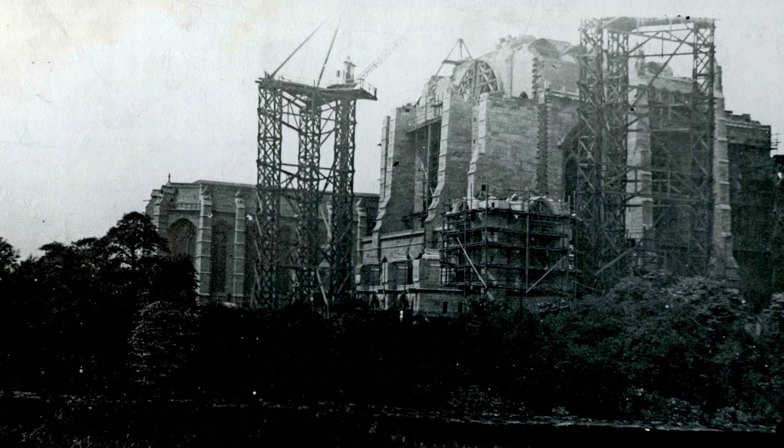I was intending to upload a slideshow of old photographs of Liverpool Cathedral's construction as an annex to LHFE End. But after seeing so many warm and wonderful responses in the comments section, I thought I'd add some commentary to address some questions and queries.

The first thing to note is that on the internet, when doing a Google or DuckDuckGo image search, you won't find endless historical construction photographs. But if you start looking in archives, you'll find a lot of interesting stuff, which I'll be covering in LLG. This is where I've learned that books like this are very helpful - there are a lot of archive photographs and documents not accessible in free digitized form on the internet, but have been published in books.

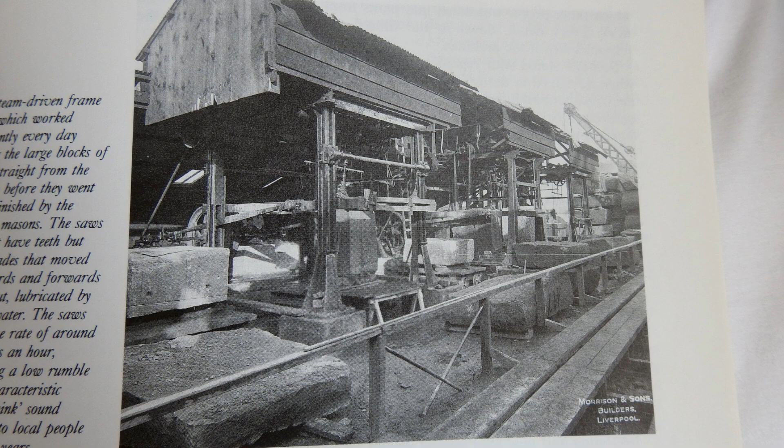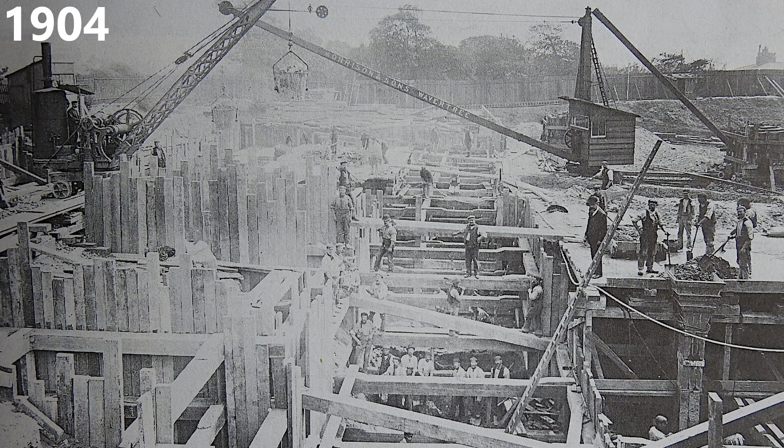This is a photo of early excavation work in 1904. The timbers have been used to construct a supporting amphitheatre, and if you look closely you can see on the steam-powered cranes one of the building contractors, Morrison & Sons, Wavertree.

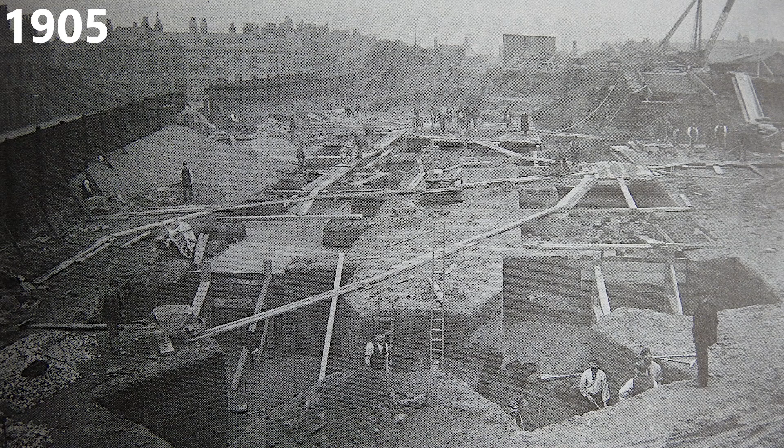The first area of the cathedral to be built was its Lady Chapel. Here are the foundations for that. What's important to note is the chapel is just one small portion of the overall structure.

Here is a progress shot. If you look closely, you can see the layers of brickwork forming here.

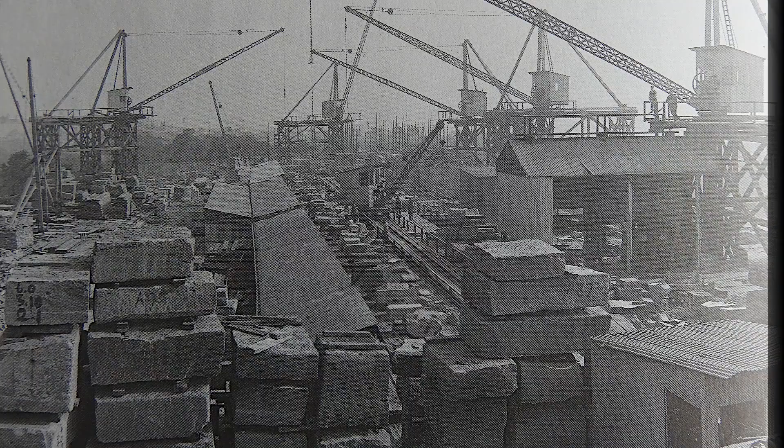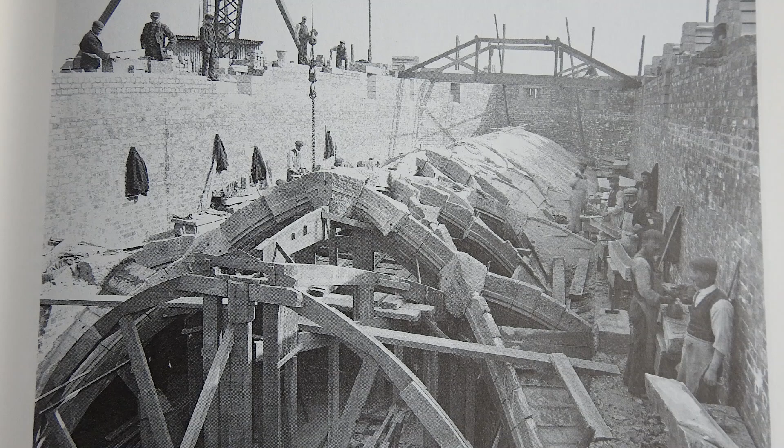Next came the chancel. Here is the beginning work on the chancel, again another portion of the cathedral. All the while the Lady Chapel is coming along nicely. The Lady Chapel and chancel were actually the first parts of the cathedral to open to the public.

And why did it open when the rest was not completed? Because there was a requirement to meet the demands of a growing and pious population. The First World War halted progress, but it resumed in the 20s.

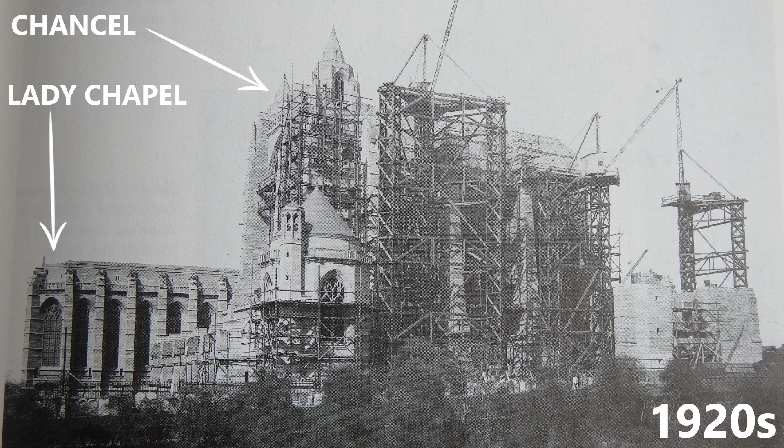This is a photograph taken in 1924, showing the completed chancel. Then came the central space. Here is one of them making good progress on the central space. And another.

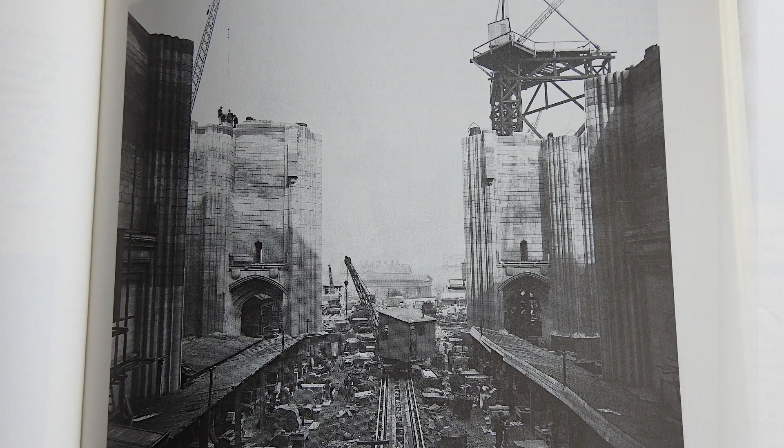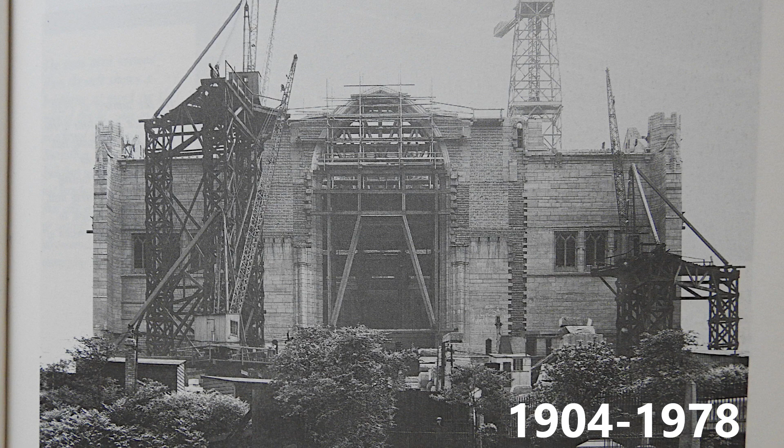There exists no evidence of this being a rebuild or renovation. The cathedral construction began in 1904 and ended in 1978. That's 44 years ago. It's the largest cathedral in England.

The cathedral's construction is not the mystery here. The mystery of this site is the old water tunnels that were constructed during the Enlightenment and the spring which still runs today. This site replaced an old medieval water system and infrastructure.

I've also seen a lot of comments insisting that we cannot build these structures, that it's a lie. And at one point I also thought that. Construction started in 1904 and finished in 1978.

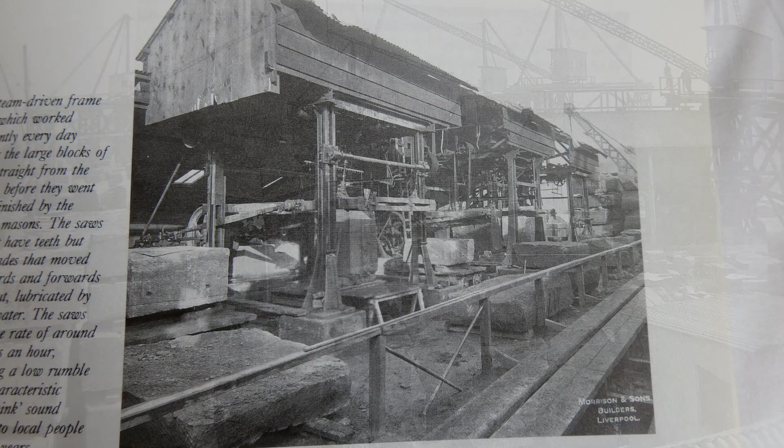Before World War II, the means of construction was primarily Industrial Revolution technology - steam-powered cranes, steam-powered saws, etc. This is a photograph and footage of the steam-driven frame saws, which worked every day cutting large blocks of stone procured from the quarry. After World War II, there was more modern technology, such as pneumatic drills.

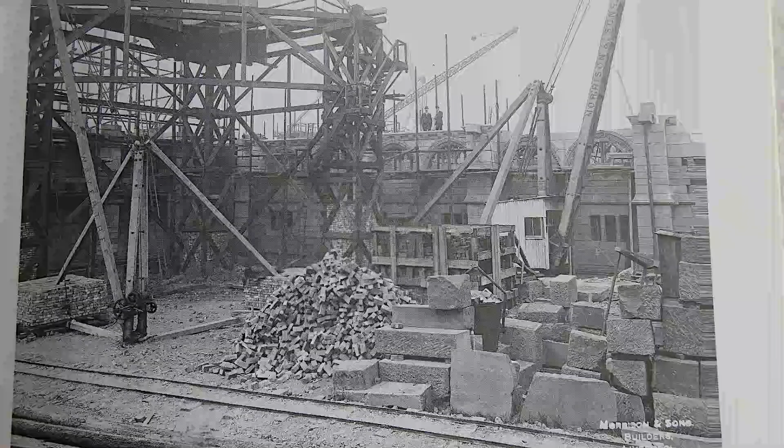The wars slowed the progress of this structure significantly. If it wasn't for the wars, I'd venture that they may have got it done in around 45 years. The interior of the cathedral walls are made from thousands and thousands of red brick.

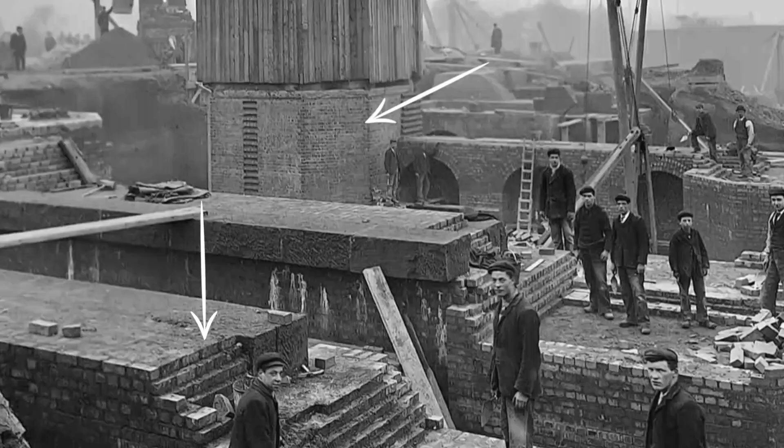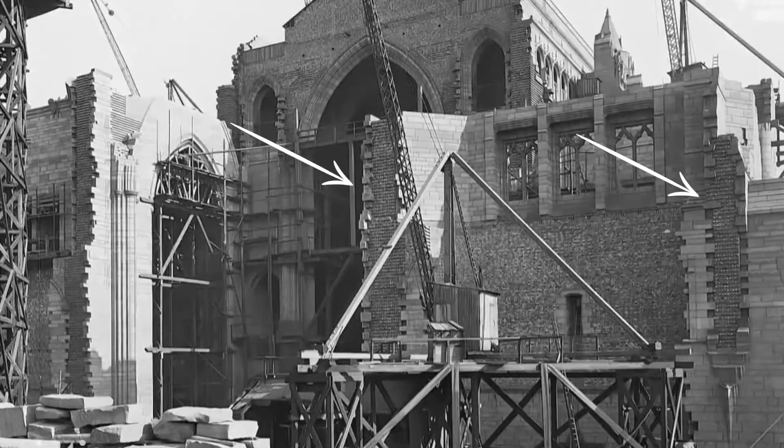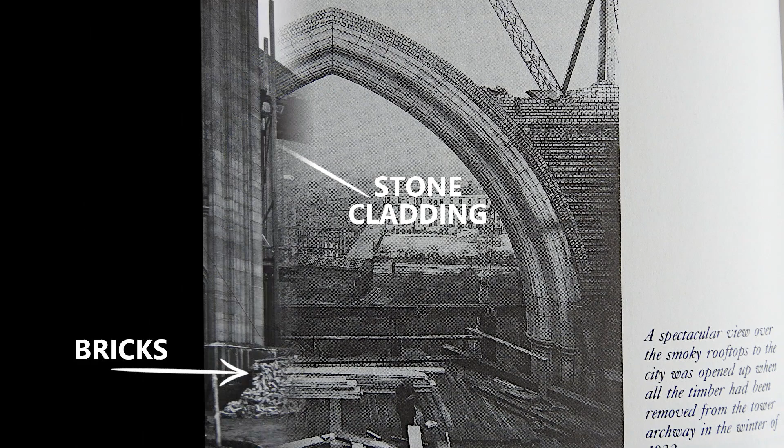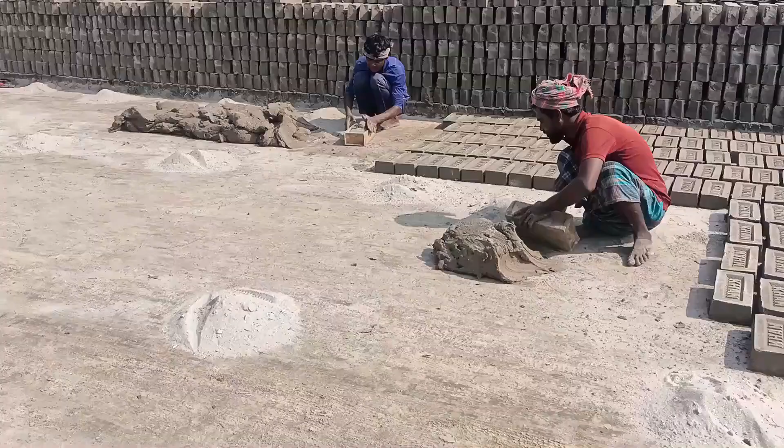The exterior is sandstone cladding, or a facade, and you can find an abundance of photographic evidence testifying to this. Red brick is beautiful, but really bricks in general are nothing special. They're efficient, easy to produce en masse, and have been produced en masse since antiquity. They certainly could do it in both the 19th and 20th centuries.

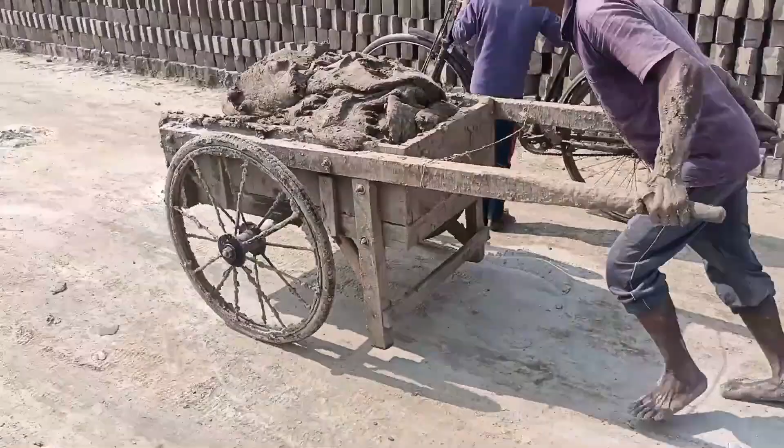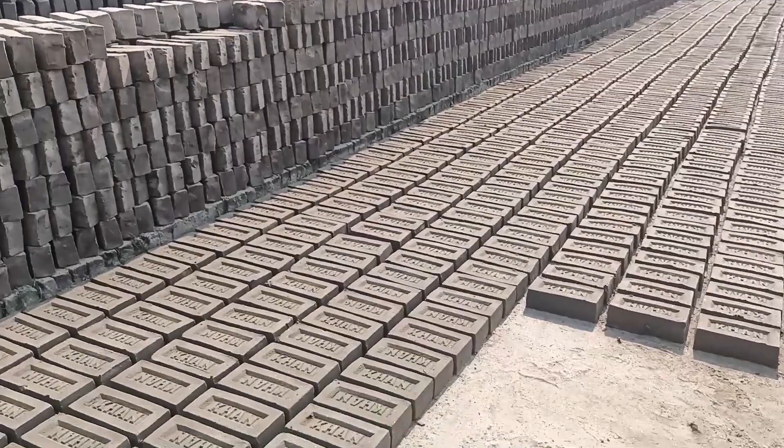There is a difference between old red brick and 19th century Victorian red brick. Now you might say, aha, so Liverpool is not a real cathedral if the majority of the wall's interior are composed of red brick. But that's not correct. If you look at many medieval cathedrals, you'll realize that the walls are composed of a type of rubble interior and then a carved stone cladding exterior finish. Again, there is nothing impossible or particularly special about this.

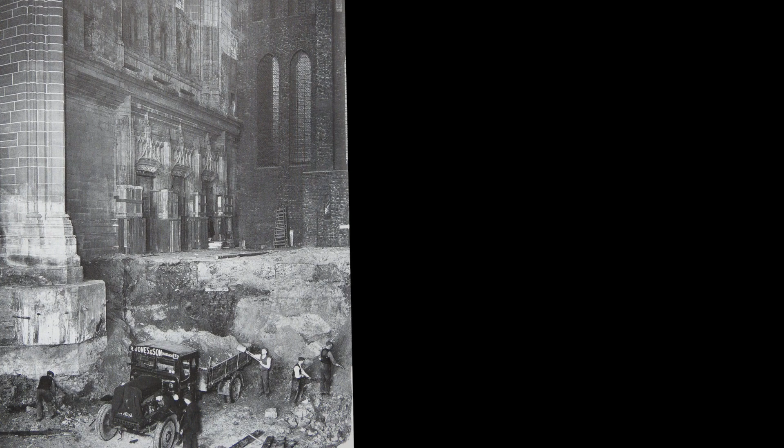What we see here with the red brick is nothing more than a modern upgrade to this medieval technique. The red brick also explains this photograph. A few in the comments have referred to this image as proof of a rebuild, or that the powers that be are lying about this structure.

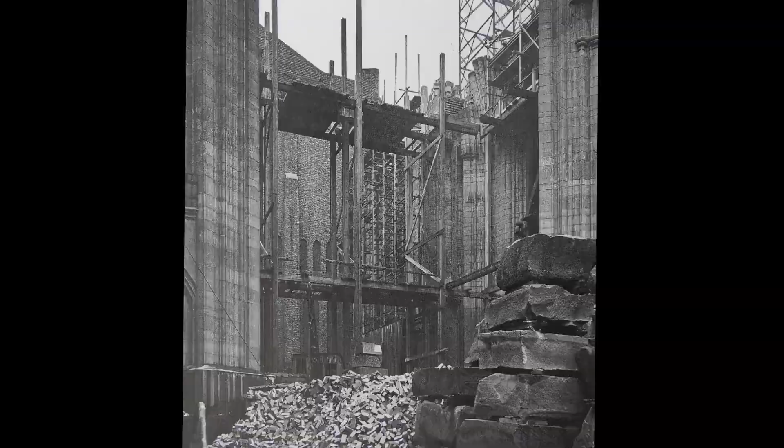But if you look closely, you can see that the photograph here shows a red brick wall. The same red brick we see here. And here. And here. And here.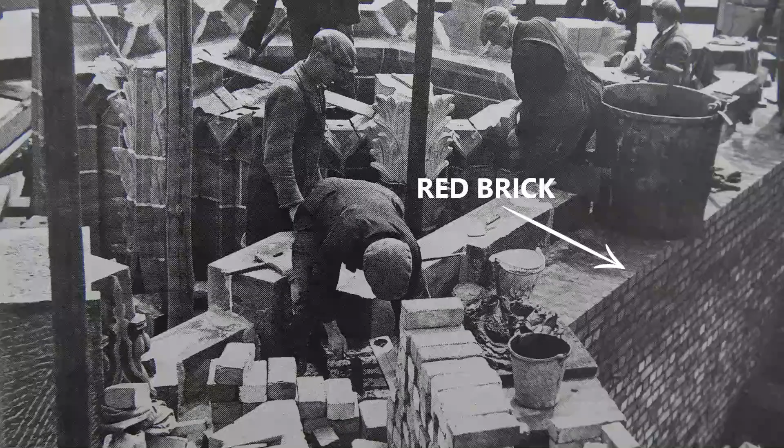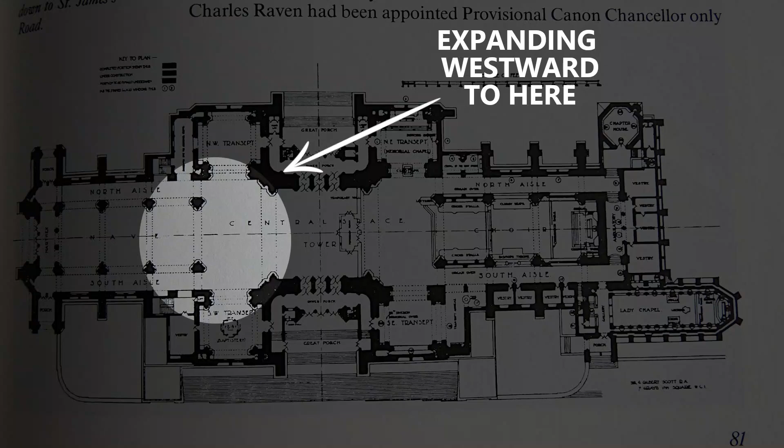Why? Like I said earlier, the cathedral actually opened much earlier, starting with the completed chancel. This is a long time before the structure was completed in its entirety. In 1938, when this photo was taken, they were expanding westward to here. This red brick wall here is a temporary wall.

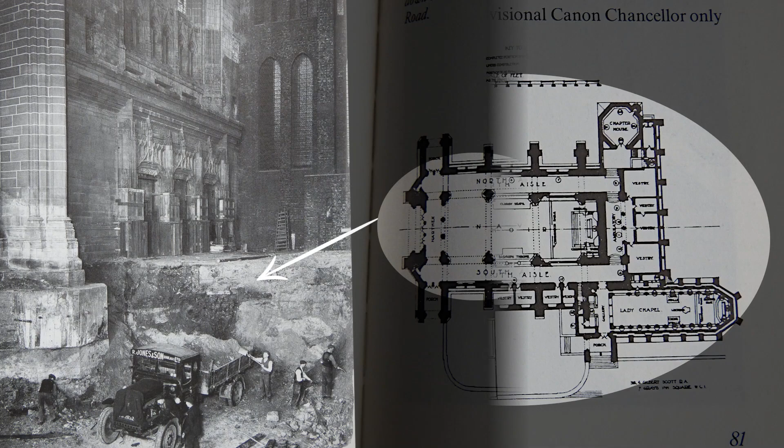Brick walls are easy to build. Ultimately, brick is Lego, and the public was still using this area of the cathedral. They are digging here to lay the foundations for the westernmost end of the nave. As you see here in the aerial shot from 1965, this end was still not complete and continually undergoing extension. Temporary brick walls allowed the population to attend services simultaneously.

Here is a close-up of this area as it progressed in 1969. Look, another temporary brick wall. And if you still don't believe me, then compare this area with a photo I took myself. This decoration is the same.

This border was not added yet. This tracery is the same. And these statues here are being sheltered by the timber boxes here. But as you can see, the stained glass up here is finished. Look, here is an image of them designing the glass.

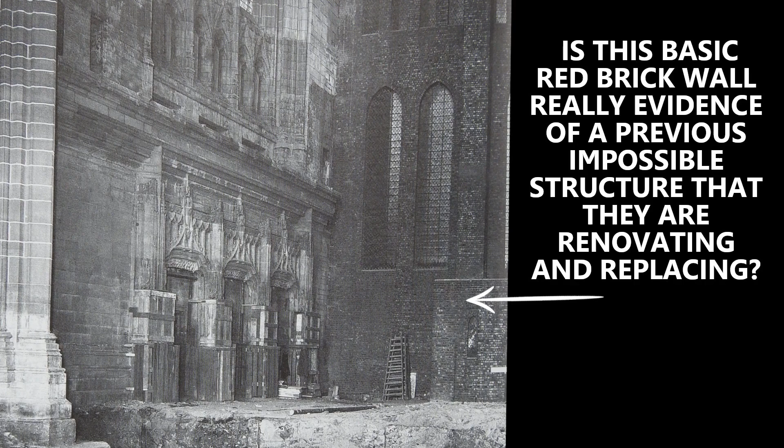Is this basic red brick wall really evidence of a previous impossible structure that they are renovating and replacing? Here is an image after the temporary wall was dismantled and the arch in place. A service is taking place despite the arch frame still being in place. As you can see, they used the cathedral while they were still constructing it.

I know you'll say the structure looks weathered and older in this photo, but you have to remember that this section is not complete. There is no roof above. The rain, the sunlight, the camera all affect how the stone and brick look in a photograph. We see that here. Variations in tone and highlights are not proof of genuine weathering, especially in old photographs.

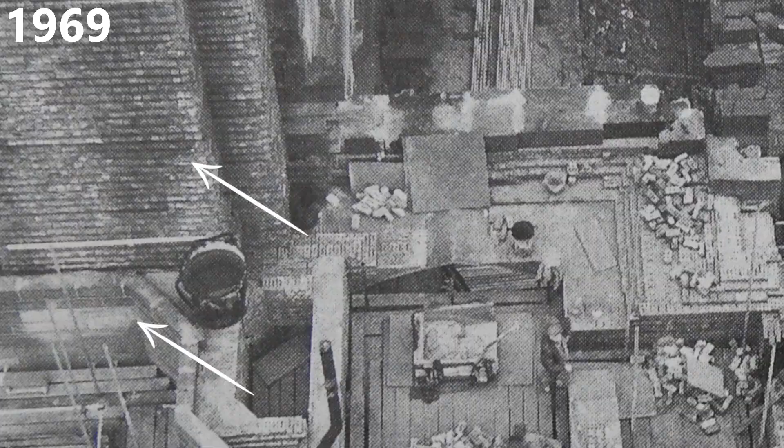Another trend in response is that Liverpool Cathedral was post-industrial revolution. What about the ones that came before? What about the structures that took 300 to 400 years?

And this is where it gets complex, and it's one of the central themes of LLG. In terms of genuine medieval cathedrals, Hereford Cathedral was completed over 171 years, York Minster 242 years, Gloucester 410 years, Salisbury 100 years, Wells 274 years, Exeter 288 years, Lichfield Cathedral 145 years.

But in terms of a lot of the structures that went up during the 18th century and after, and at such pace, this is where it gets complicated. Can you tell the difference between a structure like this and one like this? I never used to be able to, and I still struggle.

Both are in the Gothic style, both are parish churches, but Ludlow is genuine. This is what the interior looks like. And Belper, well, have a look.

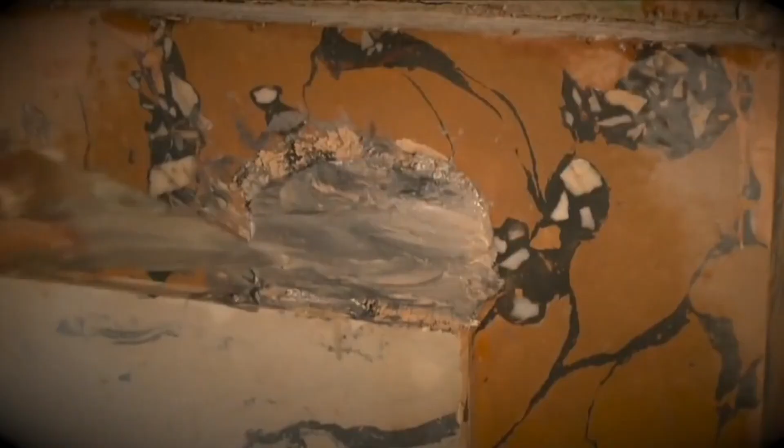There are many artificial stones such as Victoria stone, Portland cement, and stucco that went into the creation of a vast amount of classical and Gothic revival pieces completed in the 19th century, produced en masse with moulds. There is a difference between real, purist masonry and pseudo-masonry. These structures are not all equal, and they openly admit that they cut many corners. And why not? If you're producing en masse, you need the cheap and the efficient.

There is nothing impossible about this classical stuff, and I didn't realize that until I started getting out and looking at it closer. I'm not trying to discredit pseudo-masonry. Moulding like this is a talent in itself, but it's not the real thing.

But it does raise an important discussion as to how easy it is to edit and change structures with these techniques. I received a good comment on this, saying that stone carving is a hoax to throw us off the mark, that it's all poured concrete. But I do not agree. Great Pyramid K is good, and everyone should watch it, but it's deeply flawed and more of the same reductive revisionism that doesn't hold up to scrutiny. And the ending is very questionable.

This is all a big theme of LLG. I do not subscribe to the maximal approach. Not everything is poured, just as not all geology is a melted building.

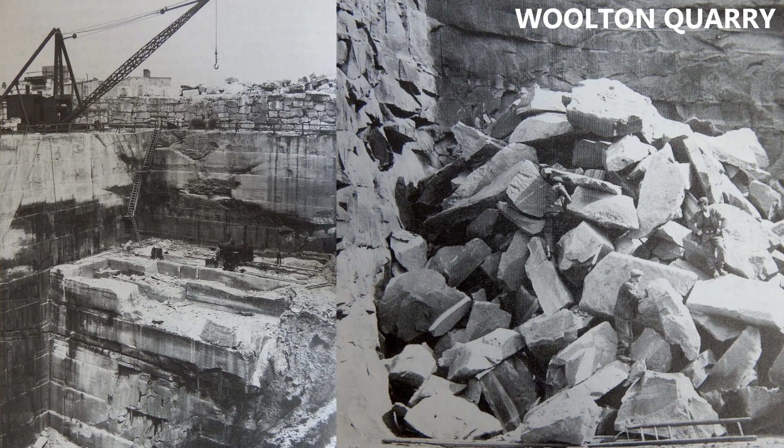And we see the same thing here. And here. This rock was quarried from Woolton Quarry. If you look, you'll see it's the same red pigmented sandstone.

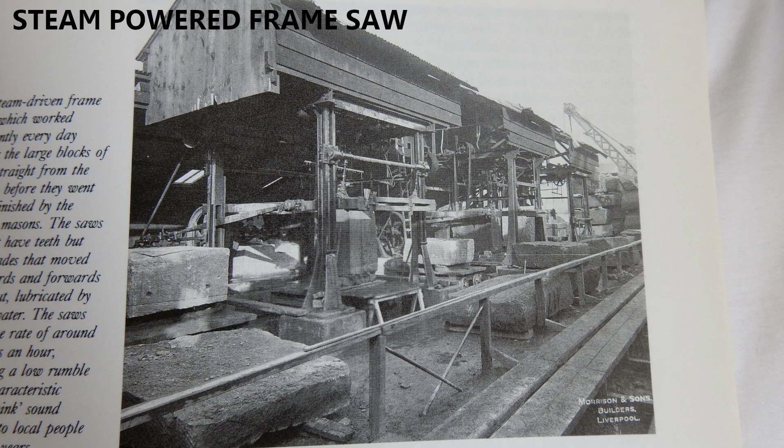This was cut with steam-powered machines and hand tools, but this only speeds up the process. The medieval masons built their sites right next to local quarries to be more efficient.

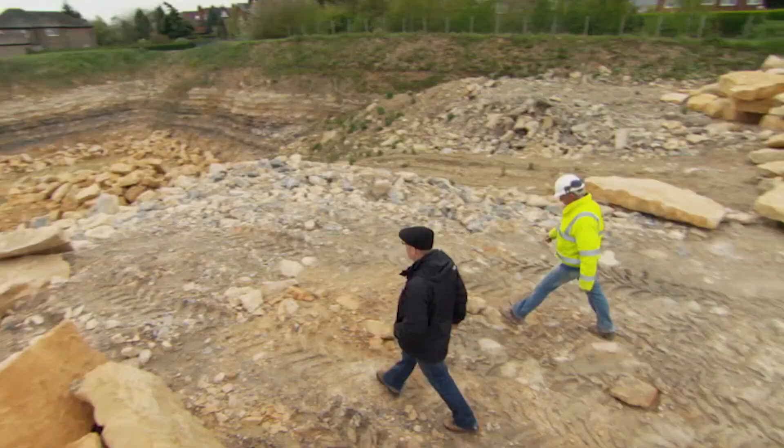Here in Fountains Abbey, you can see part of the long quarried wall here, and it runs all along this site. Lincoln Cathedral's quarry is 1 mile away, and they still use it today to renovate and replace the aging stone of the cathedral, using traditional masonry techniques.

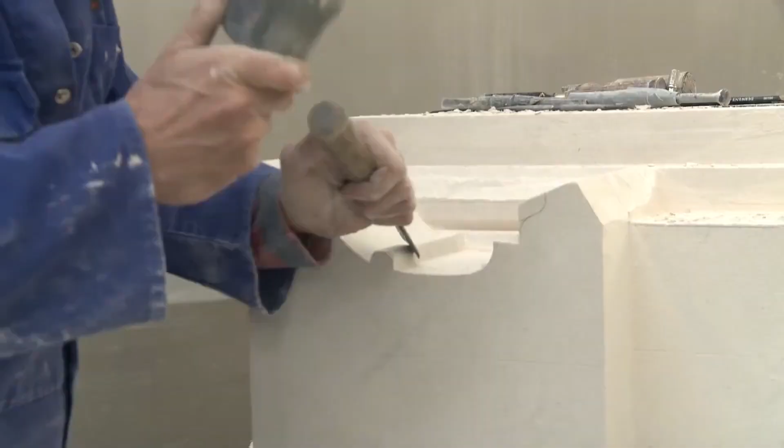If you go to quarries or watch masons work, you'll realise that stonemasonry is indeed very possible. It's not a hoax, and the skills passed down the generations prove this. All post-industrial technology has done is reduce the time frame it takes to complete a structure.

These medieval structures took hundreds of years to complete, and much like Liverpool Cathedral, they probably were used in sections of the structure before the entire thing was finished.

Now, whether the time frame for medieval construction is a lie and the Industrial Revolution actually occurred much earlier in our timeline is one of the questions I will be investigating in my new series, and asking whether the cathedral's use was primarily for worship or perhaps something else.

But there is a lot of complexity that needs to be presented first. Each structure is different and requires its own in-depth research that, as I have come to learn, needs attention beyond Wikipedia. And it's mind-boggling to contemplate what those of the past achieved.

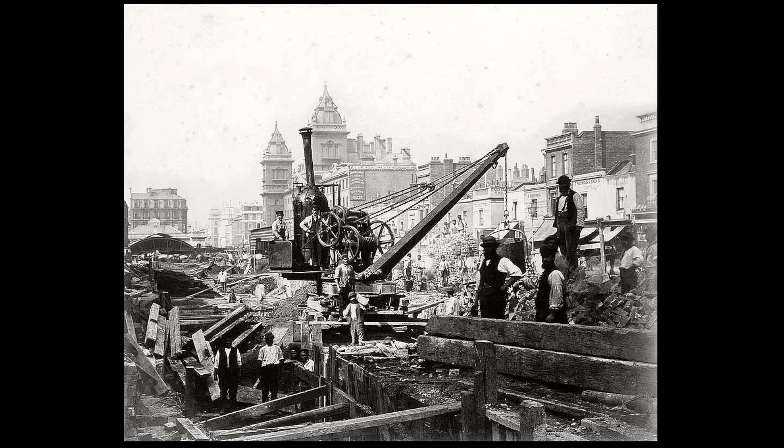And the most tragic thing about this whole investigation is that it throws into sharp contrast just how much we've regressed as a society and cannot recognize human talent anymore and ascribe it to something else. There were advanced civilizations in history, but there was no Great Reset in the 19th century. Our ancestors were the advanced ones, and our culture demonstrates this.

Culture is not limited to architectural expression. Compare the literature of the 1800s with our writing today. Listen to Beethoven.

Taste the traditional cuisine of the past and compare with today. The way we painted back then, and now the art we produce today.

The big lie surrounding the cathedrals is not the impossibility of their construction. The lie is something else, and it's a lot more complicated, worrying, and mind-boggling than I first realised. I got it wrong, and now I'm going to correct it with a new series.

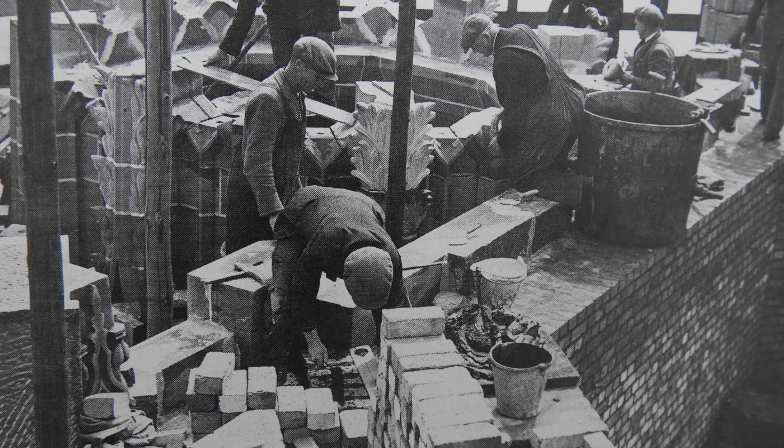But I will not continue to discredit or erase my ancestors when there is a wealth of evidence and information working against me. I cannot do it, especially just to appease a thirst for conspiracy.

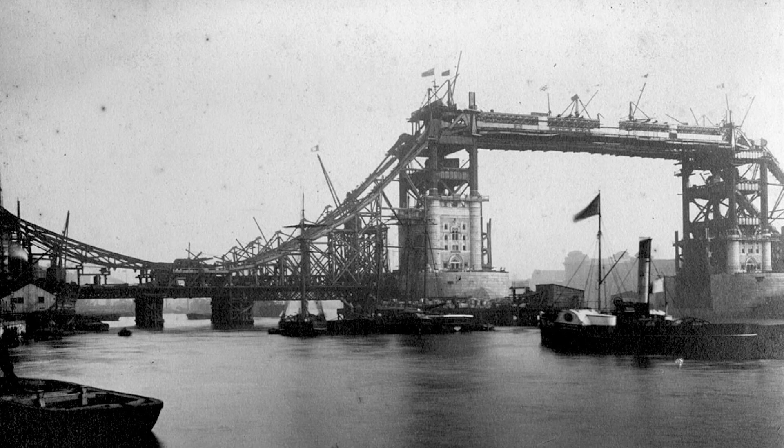Like I said, there are big lies, and there was a Great Reset. It just didn't happen in the 19th century. And the impossibility of the architecture is not the issue. We can build like this, and we can definitely pour cement and mold concrete.